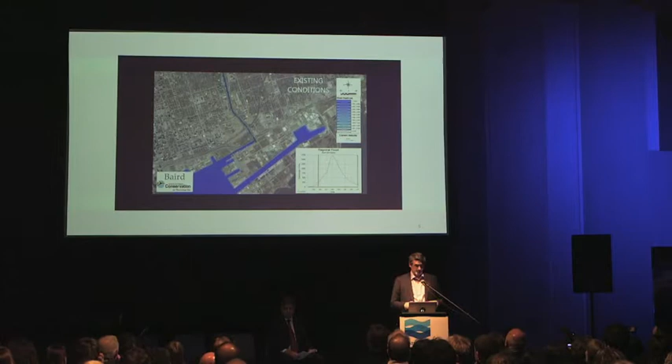So it creates a significant flood risk for most of the Portlands north of the ship channel, which is that long blue line - the channel still used for shipping as part of the port. Really between there and the river, that whole zone, as well as some of the area south of Eastern, those neighborhoods are all still in the floodplain.

So this project is about flood protecting the Portlands, flood protecting part of Leslieville, and really making it possible for revitalization to finally happen here, because it has been held back not just by flooding, but also by contamination. What you can see here is an aerial photo from years past when much of this land was used for storage of oil and coal tar.

The remnants of that are still in some places in the soil. So we have to dig up the soil, remediate the soil, make it habitable and safe for people, which we have specialists on our team and consultants helping us do, and make sure that it's safe for the river to run through it. Once that has been excavated and cleaned up, we will then reroute the river and create the outlets necessary to let the river run free and stop flooding.

For those who are on the 20-year circuit, we have a photograph here. Pictured in the blue sweater is Mark Wilson, who was the former chair of Waterfront Toronto, way back in the day when he was starting up the task force to bring back the Don. So the efforts to do something with this river really have been decades in the making.

I think this effort started in the 80s. In 1989, they formed as a real group, and in '91 we had the task force to bring back the Don. So we have this amazing story of a community activist, river activist, who went from activist to chair of Waterfront Toronto, and Mark was at the helm for much of the time that we were planning the restoration and flood protection of the river.

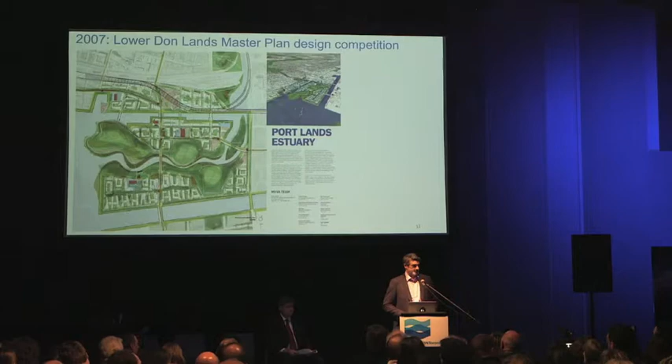They will be getting up here to present their work shortly. They are the ones who produced the rather amazing model that is to your right in the room. Thankfully, even though it's been 10 years and they haven't gotten to actually design the river until now, they haven't quit. So we're really glad that they're sticking with us throughout this process.

In the back on the screen behind me is a timeline of how we've gotten here. I'm not going to go through the details, but as Councillor Fletcher mentioned, we did our design competition, and then went through the rest of the environmental assessment process in 2009. We were very close to having a completed environmental assessment for a version of the plan that you see today.

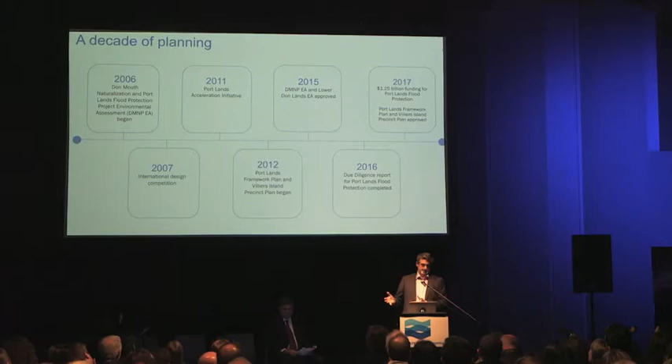We then had the alternative planning process that the councillor mentioned, which led to the Portlands Acceleration Initiative, led by David Kusturin, who will be getting up here to speak in a minute, and the due diligence report and the eventual completion of the environmental assessment.

So as of 2015, we had approval for this project. We're now into detailed design. So some of what you'll see tonight looks a little different than some of what was in the drawings, but that's part of the natural design process.

I know Michael Van Valkenburgh's team is really excited to be sinking their teeth into what these wetlands really look like, what plants are in them, what is the course of the river, and how do we bring recreational uses here that can make this part of the whole ravine recreation system.

That's very much what we're looking for your feedback on tonight as part of this process, as this design evolves. There will be more iterations of this over time, and we will continue to solicit public feedback as that happens. So that was a maybe not so quick history of how we got to where we are today.

Thanks, Chris. I've got a minute and a half. I'm kidding.

So Chris showed a bit of a video of what the floodwaters would look like in a regulatory storm. The blue areas here are actually what the flood, or where the floodwaters would flow to in that storm. You can see there's an area that someone in our office thinks looks like a rhinoceros, outlined in blue, that goes into the downtown.

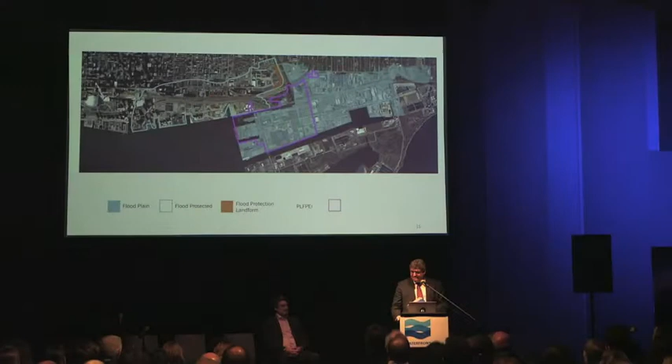The area that we're going to be involved with is outlined in pink here. That's the boundaries of our project site. That's about 290 hectares of land that you see there that's currently at risk of flood. That will all be removed from the floodplain once this project is completed.

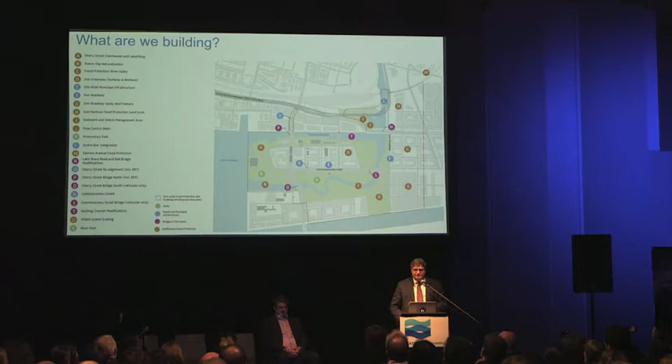This is the project. It's a number of different components. Effectively, it's the creation of a new river valley and the construction and implementation of infrastructure required to service this land in the future, as well as to accommodate the construction of that river. It includes 4 components: the river and flood protection features, the roads and services, bridges, and new parks and public realm.

First and foremost, we have the river component. There's the main river itself, and then a number of river structures, floodplain, landforms, valley wall features. In fact, the entire area outside of the river will be raised by anywhere from 1 to 2.5 meters to bring all of these lands out of the floodplain.

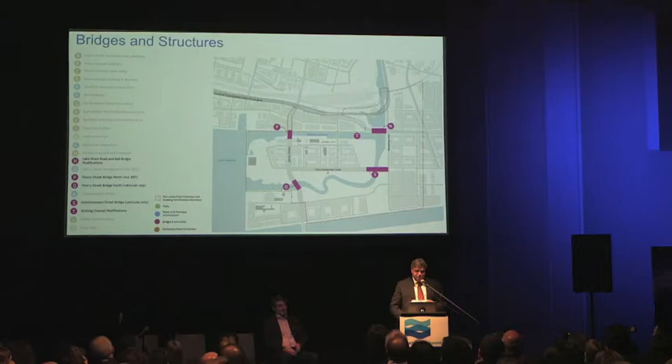That's the biggest part of the project, what we're involved with, and that's about 8 or 9 different large components. The second piece is bridges. We have 3 brand new bridges: the Cherry Keating Bridge, Cherry Bridge across the river mouth, a new bridge at Commissioners Street, and rebuilding the Lakeshore Bridge across the Don River.

We've got new roads, or rebuilt roads. Cherry Street will be rebuilt in a new location slightly west of where it exists today. Commissioners Street has to be rebuilt, as does the Don Roadway. There's a couple of reasons for that. I mentioned that we're actually raising the grade, so all of those streets are at current grade. They all have to be raised by anywhere from 1 to 3 meters.

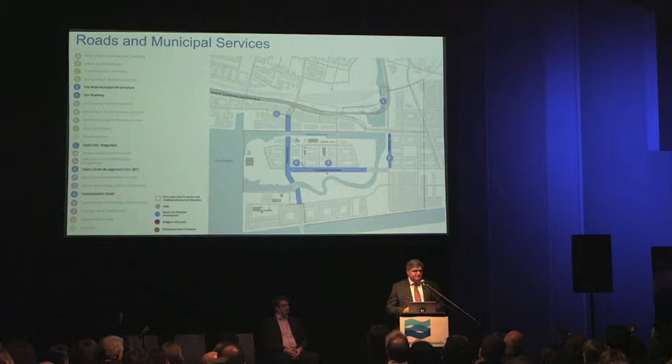They also all need new services. The services in the Portlands were installed 50, 60, 70 years ago to accommodate the industrial uses in the Portlands. We are looking to create new mixed-use neighborhoods, residential and commercial properties, and the services required for those properties are substantially more demanding than the services that exist to date.

And then, although they will be built last, there's the new parks and public realm: Promontory Park and the river parks, which will line the river all the way from the existing mouth to the new mouth at the inner harbor.

So how did we get here? We spent a lot of time, as Chris mentioned, in the planning, and once we had that approval from the province in terms of the environmental assessment, we undertook a due diligence exercise. That was really to give us and to give our government stakeholders confidence that the schedule, the budget, the scope of this project could be delivered for the numbers and timeframes that we were telling them we could deliver.

We spent a great deal of time looking at the site, doing site testing on geotechnical and environmental contamination. We looked at schedules, we looked at cost for all of the components, and we looked at how should we deliver the project. What is the best way to reduce risk to the public sector and engage the private sector to the maximum extent that we can, leveraging their knowledge and expertise? And what were some of the unique risks and challenges we would face?

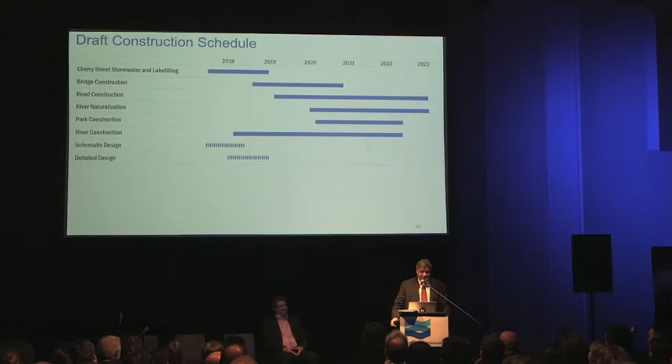It's real news. We will then begin construction of bridges, roads, doing the naturalization, and ultimately the parks, and expect to have the project fully complete, including all the trees and green spaces that you see on that beautiful model, by the end of 2023.

So I mentioned we have started work. You can see the little island poking up above this barge, and if you've been lucky enough to see this show up about once a week or so, there's about 8,000 tons of material that we're depositing at the mouth of the Keating Channel, and again, that will continue through this summer and in fact through into next year.

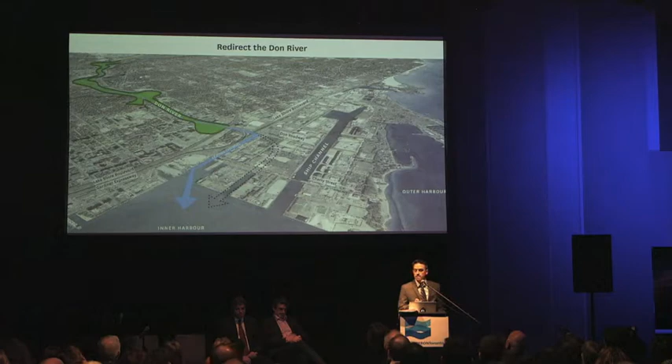One of the big drivers for the competition scheme that MVVA brought back in 2007 was looking at those existing conditions, that hard right-hand turn that's been referenced as it hits the Keating Channel, and the natural flow of the Don River wanting to revert back to pushing out towards Lake Ontario.

So the scheme our office brought was thinking about redirecting the Don River and allowing that new realigned river configuration to structure the urban form, with the open spaces left to the edges of that.

Part of that driving idea was that we would address flood protection with a three-tiered approach: one being this new naturalized mouth of the river, two being using the existing Keating Channel as is, and thirdly, having an overflow spillway that would go out to the existing ship channel.

So in looking at the full composition of all of the potential development that this unlocks, it creates a significant new series of neighborhoods within downtown Toronto. Within this dashed blue boundary would be the limit of parks and floodplain work that is part of the final condition of this flood protection project.

So we're looking at nearly 100 acres, as was noted, of new open space and river edges that are being created. So in the last few months, we've dropped back into the world of thinking about this project at a detailed design level.

Some of the bigger challenges in finding that coherent integrated solution: first would be flood control, two, the naturalization that's required as part of the environmental assessments, and then also the need for placemaking.

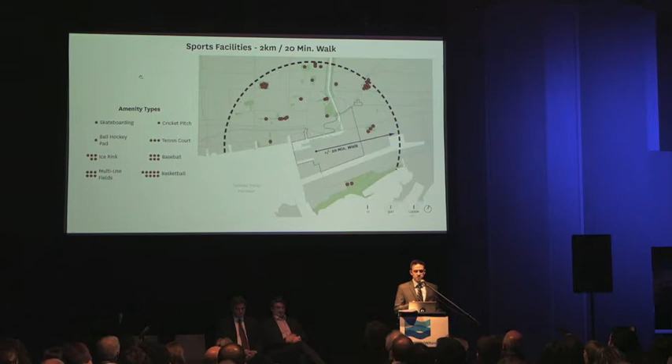Likewise with sports facilities, there's certainly some multi-use fields and baseball fields. We've started to think about how those are being used and the importance of what needs more of in this area. Accessible nature, we certainly know that this project will bring a significant component that is underserved at the moment, because currently it really only exists within Corktown Common and the Cherry Beach area. And then lastly, citywide destinations.

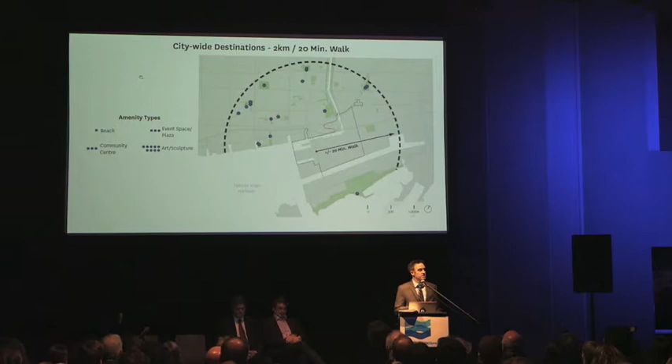One of the opportunities we see here is that this park system, this very large contiguous open space that is the anchor to the waterfront, has a great opportunity to add citywide destination type programming, which seems underserved. You have Cherry Beach Park, a fantastic one, and other spaces outside this 20-minute walk radius that are fantastic, like the amphitheater at the Music Garden or the event space plazas around Harborfront. We've started looking at how those programs could be distributed across the entire park. The prominence of Promontory Park, as it's been called for the last 10 years, lends itself to great citywide destination programming, with close proximity to the future LRT stations off Cherry Street—a great moment for sightlines back to the city skyline.

We also think there's a great opportunity at Villiers Park, at the very east end of the project, as another moment for a citywide destination that draws you to both ends of the new Villiers Island precinct—pooling and stretching other types of programs, from sports and neighborhood parks, down through the linear spine of the River Valley Park system.

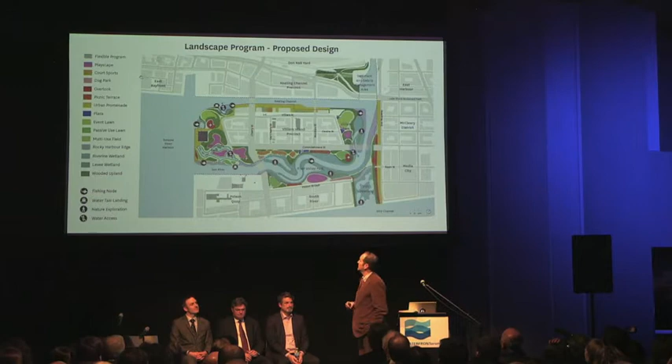So don't get nervous that you have to memorize this whole list. What you get from this diagram, which is a more refined version of the types diagram that Herb just showed you, is a kind of neat mosaic of different things all mixed together. And that, we believe, is the answer to success.

I have to tell you one quick story. When we first started working on Brooklyn Bridge Park, which I've been working on for 20 years, we went to community meetings, and of course everyone doesn't understand what's going on, and there was a lot of apprehension because it was an abandoned industrial waterfront. A lot of people hadn't been there, and it seemed very marginal and out of the way. One of the things the cynics used to say, a lot of them, was no one's ever going to go to Brooklyn Bridge Park, because it was a little distant. You had to ride your bike to the area, and it wasn't easy. So it wasn't an unrealistic idea to say that.

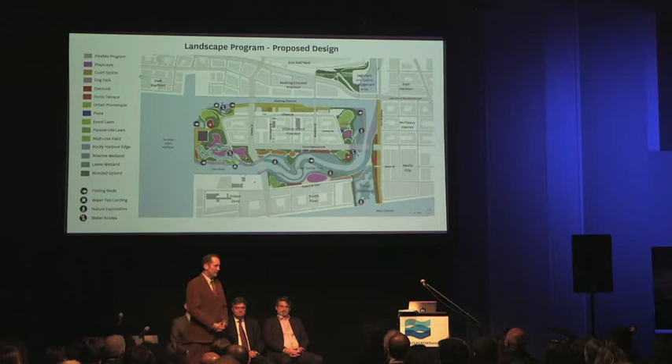Basically, through the consultation process like this, and I worked on that with Ken Greenberg, who I see right in the audience here, we had an extensive outreach, and people talked about what are the unique possibilities of the site. And then, of course, there's just lots of good, clean fun that people want to have, right? Fun is always a key to success, too. And a lot of it is not that hard to do. You just need to do it.

So what this diagram talks about is a big mixture, or a mosaic, of a lot of good, clean fun. Some of it you expect, and some of it is going to be unique. And guess what? That's what we did in Brooklyn Bridge Park. We made this whole collection of things, one after another, and it's sort of the collage experience of it, seeing one after the other in an almost surreal way that makes it extremely compelling. And if Brooklyn Bridge Park has got any problem right now, it's that it's kind of too crowded sometimes for misanthropes like me who want to just go out in nature. So anyway, they were wrong about no one's ever going to come, and we're going to have a success here too.

One of the great things for everything that's coming after this is that the public space is going to be made first, or at least phase one of it, and that will create the 'there,' remove the skepticism, and make everybody excited. So one of the things we can do is make edges that engage the water and allow you to get close to it like this.

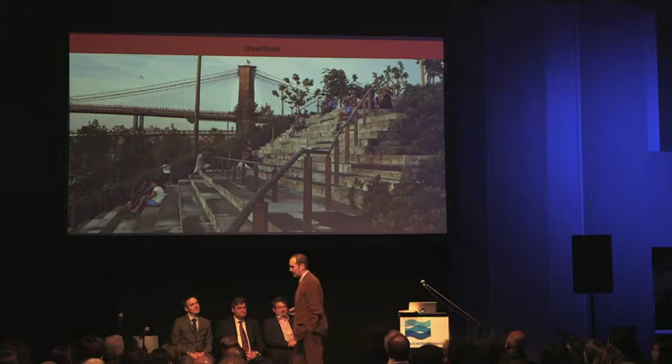This is a kind of romantic overlook, like that Ethan Hawke Paris movie, sitting near the river and overlooking, having your own romantic moment. We need to have places for that in the park, and we can do that - overlooks getting high in elevation above the shoreline.

You wouldn't think, because it's such a view, right? It's so flat and there's so much view, you'd think, well what? But actually when you get up - this is sort of the lesson of Riverside Park in New York City - you get a whole different dimension, and you get to look down on other people in the foreground, so it's a great opportunity.

You could also have overlooks that are right near the edge of the water as well.

The picnic terraces - we had a concept we're applying here, and I'd love to hear your feedback on it. We called it the in-town vacation. If you have something for everybody in the family, for the old people, the littlest people, and the teenagers - those are very hard to make happy, but you can. If you have everybody happy, you don't need to leave. You can stay there all Saturday.

You don't just take the kid begrudgingly to the playground for an hour and a half, or as long as you can stand it, and then take them home again. You can go here, and the teenager can play soccer, and grandma could chill out, and mom - all these different things can happen at the same time. And then when you all change places in life, which we all do, you can still be happy in the same place, because there's things for you at your different stage of life.

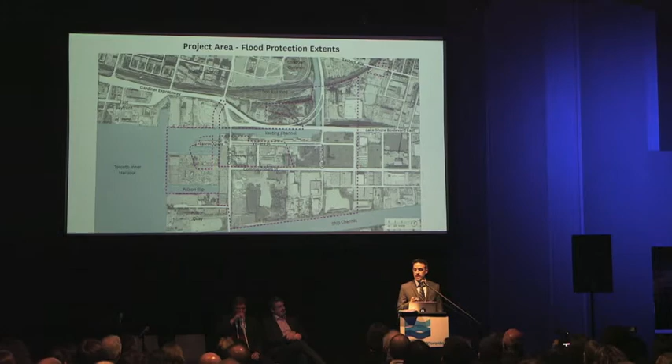The boundary shown here in pink, overlaid on top of the existing conditions photo, is the full extent of the flood protection project, including the parks, the roadways, the bridges, and the river system. Looking at the design parameters defined over the last 10 years as responses to environmental assessments and other planning initiatives, we have a series of design parameters that we use as a starting point for making decisions on the project.

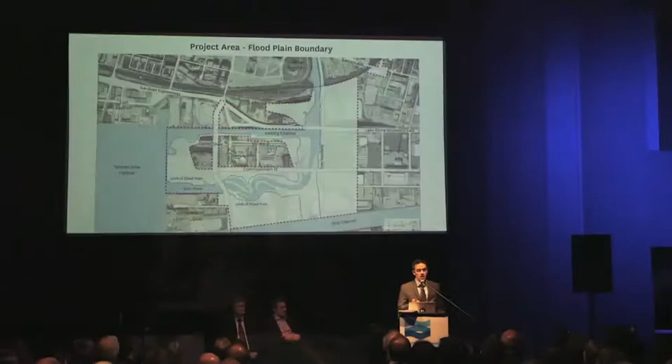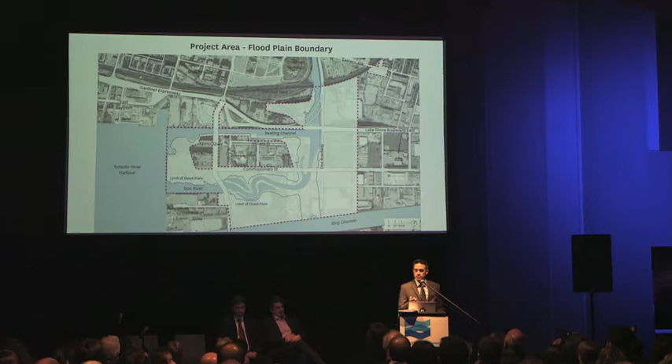First and foremost is addressing flood protection. That includes thinking about the open spaces we're creating within this project and how they relate to a floodplain line. Everything below the dashed blue line there, topographically, is needed to address a regulatory flood event — that Hurricane Hazel-size event that could flood that entire space between those two blue lines. That's really important to understand.

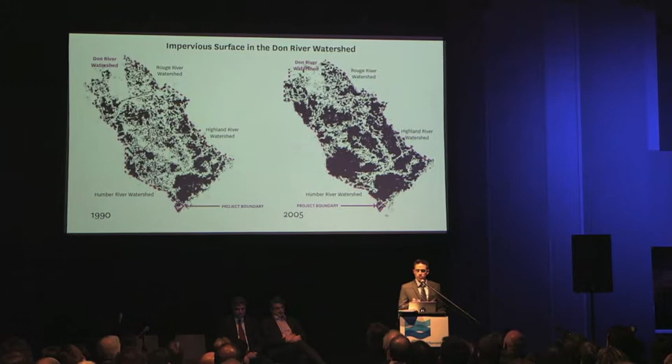Looking at this diagram over the last 15 years, between 1990 and 2005, it shows the change in impervious surfaces within the Don River watershed is quite dramatic. The dark black boundary, or dark black shaded area, shows how much more impervious surface there is in just that 15-year period the study covered.

Through the work of our team and TRCA, looking at that flood model of the conditions upstream in the Don River, the potential extent of a regulatory flood event and how much area is impacted is quite dramatic.

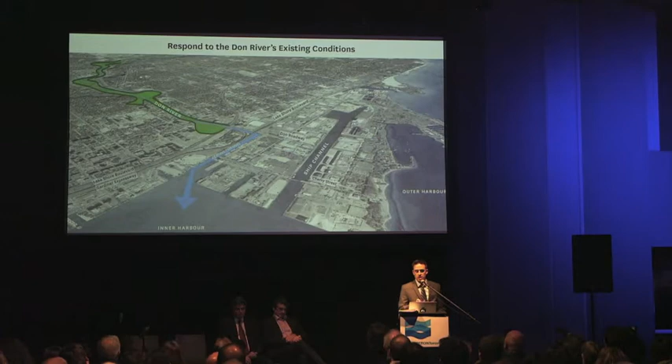One of the big drivers for the competition scheme that MVVA brought back in 2007 was looking at those existing conditions — that hard right-hand turn referenced as it hits the Keating Channel — and the fact that the natural flow of the Don River wants to revert back to pushing out towards Lake Ontario.

So the scheme our office brought was thinking about redirecting the Don River and allowing that new realigned river configuration to structure the urban form, with the open spaces left to the edges of that.

Part of that driving idea was that we would address flood protection with a three-tiered approach: one, this new naturalized mouth of the river; two, using the existing Keating Channel as is; and third, having an overflow spillway that would go out to the existing ship channel.

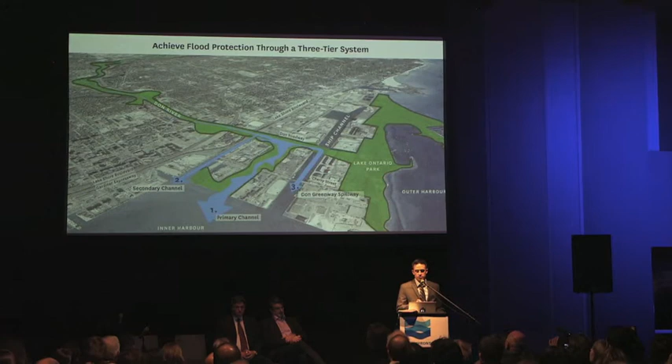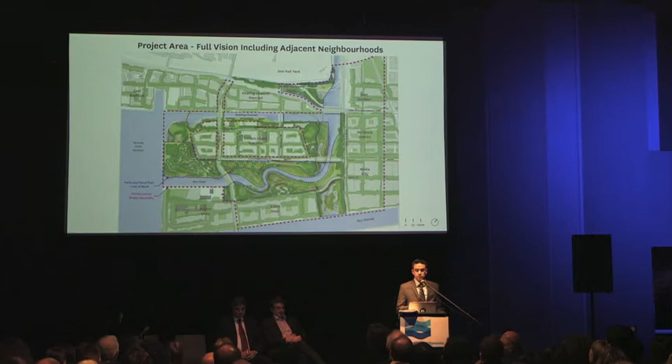Looking at the full composition of all the potential development this unlocks, it creates a significant new series of neighborhoods within downtown Toronto. Within this dashed blue boundary would be the limit of parks and floodplain work that is part of the final condition of this flood protection project — nearly 100 acres of new open space and river edges being created.

In the last few months we've dropped back into thinking about this project at a detailed design level. Some of the bigger challenges in finding a coherent, integrated solution: first, flood control; two, the naturalization required as part of the environmental assessments; and then also the need for placemaking.

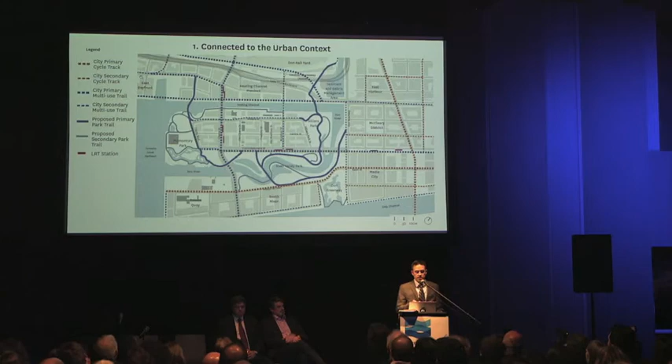We've thought about these as six big moves. One, thinking about future and current connections — whether it's the rail transit coming down through here along Commissioners Street and Cherry Street, the multi-use bike path network tying back into downtown Toronto shown by the darker blue line, other secondary pedestrian trails linking through this area, or where those moments of future LRT would be, shown as the dashed red lines here, here, and here.

Number 2 out of those big ideas was that we need to accommodate the needs of the community. That's one of the reasons we're here tonight, to get input. Out of the 10 years of work we've been doing, we've gotten a lot of good feedback, and we've represented that within the model and the boards we're sharing here tonight.

We've also been thinking quite a bit, as we've gotten into the detailed design part of this project, about the importance of spatial and sectional variety. So looking at how we can create a much more rich landscape by thinking topographically, layering spaces so you don't see everything at once.

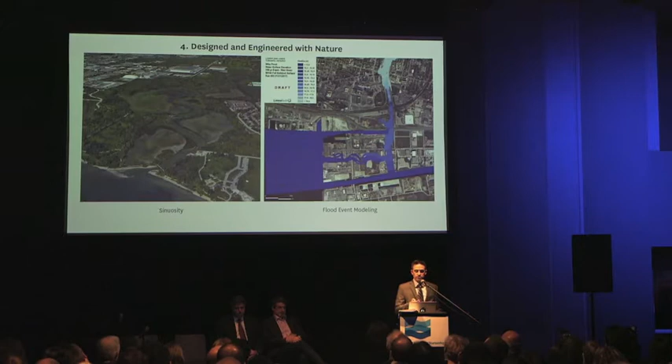Fifth would be thinking about all the layers of this and how to orchestrate that into a complete ensemble. So it's not an engineering project, or strictly a parks project, or a roadway project—it's that they're all coming together. It's a collaborative approach, a comprehensive solution.

And then sixth would be building on the sustainable principles that Waterfront Toronto has, thinking about the resilience of the systems we're doing, and how human experience needs to drive these landscapes. Those are all key components as we progress within the design phases.

As we've started to progress and refine the park programming, we've revisited how we think about the organization of these spaces, and we've identified four landscape types to help us think through that process. The first would be citywide destination.

What brings people in? How much of that do we want to have in this park? That people come from a bigger distance away. What type of amenities, programming do you want if it's a neighborhood park—the type of space people come to on a daily basis. The need for recreation, sports, and obviously you can't overlook that we're creating a naturalized river through here, so making access to nature.

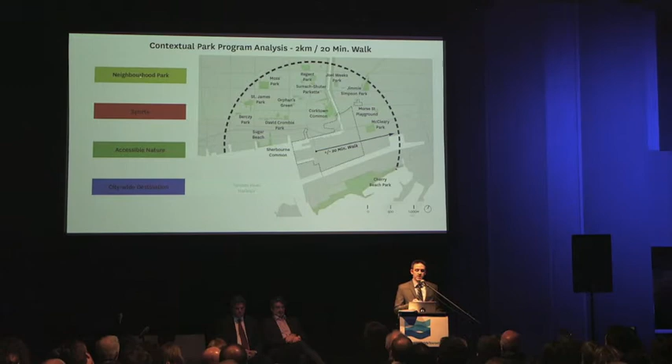So some of the work we've been doing over the last few months has been looking at that contextually, within distance of the site, and what type of activities already exist based on those four classifications. So within a plus or minus 20-minute walk...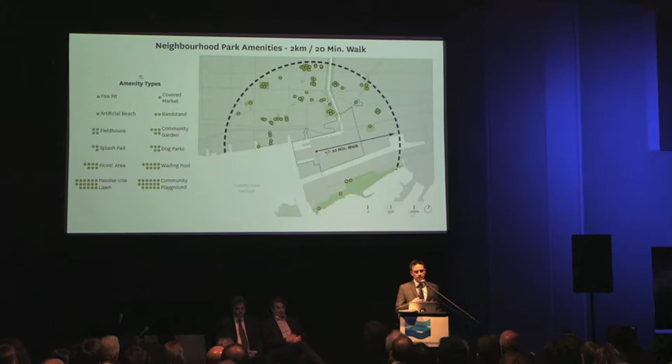You can see a range of neighborhood-type park activities, anywhere from some picnic areas and passive lawns to community playgrounds. So we've mapped that, started to classify what types of program we've seen and how they're being used.

Likewise with sports facilities, there are certainly some multi-use fields and baseball fields. We've started to think about how those are being used and the importance of what needs more of in this area.

Accessible nature—we certainly know that this project will bring a significant component that is underserved at the moment, because currently it really only exists within Corktown Common and the Cherry Beach area.

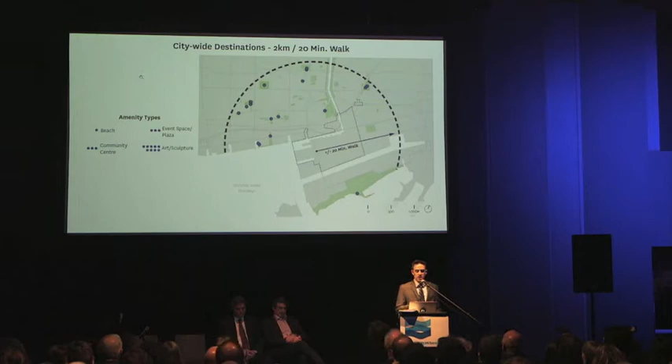And then lastly, citywide destinations. One of the opportunities we see here is that this park system, this very large contiguous open space that is the anchor really to the waterfront, has a great opportunity to add what seems to be underserved as far as citywide destination-type programming.

So you have Cherry Beach Park, which is a fantastic one. You have other spaces outside this radius that aren't within a 20-minute walk that we think are fantastic spaces, like the amphitheater at the Music Garden or the event space plazas down around Harborfront.

So we've started to look at those types of programs and think about how they could be distributed across the entire park. The prominence of Promontory Park, as it's been called for the last 10 years, lends itself to a great opportunity for this citywide destination-type programming, with the close proximity of the future LRT stations off of Cherry Street. It's a great moment to have those sightlines, those views back to the city skyline.

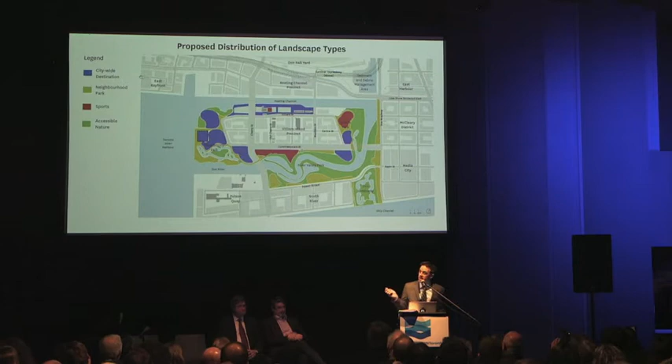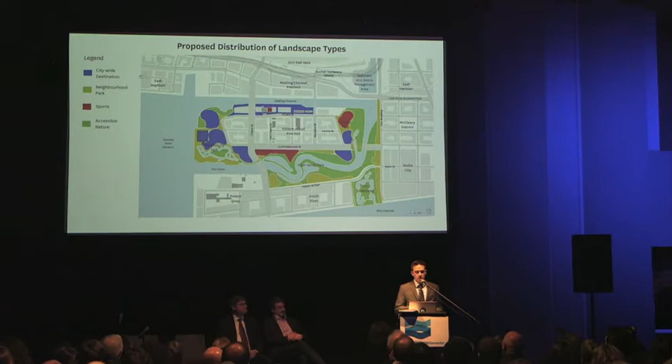Also, though, we think there's a great opportunity in looking at Villiers Park at the very east end of the project as another moment where we could have a citywide destination that draws you to both ends of the new Villiers Island precinct, with this pooling and stretching of other program types, from sports and neighborhood parks down through the linear spine of the River Valley Park system.

I think at this point, I'm going to pass the presentation over to Matt Urbanski, and he's going to talk a little bit more about the things that we think the waterfront needs more of.

Okay. There we go. Thank you, Herb. I think you all have a good idea why Herb is in charge of steering this ship right now. I think you have a little good sense of that.

I'm a newbie, of course, only 11 years on this. For a whole year, I was actually saying it was 10 years, but now I realize it's actually 11.

Some things you already have in Toronto, and some things you don't have on the waterfront necessarily. So one of the things we started with, thinking about and talking to people, is what are the missing experiences when we look at that context already.

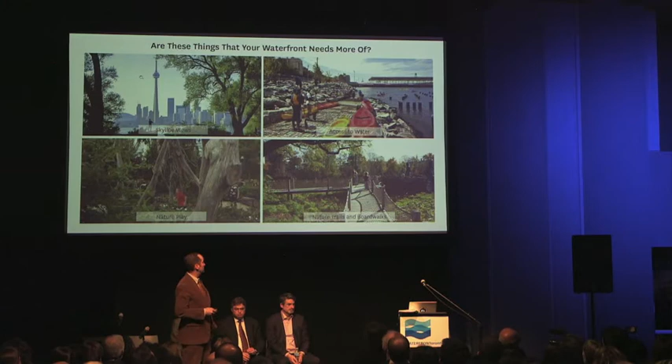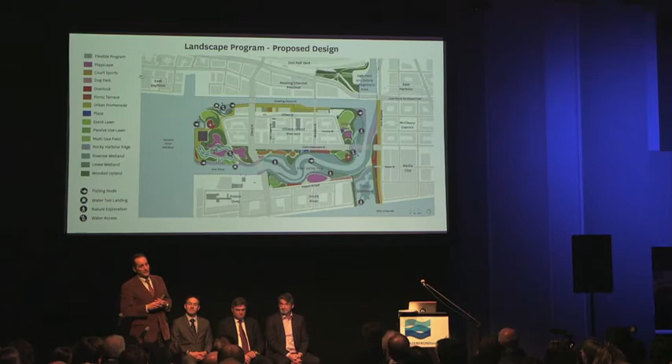I have to tell you one quick story. When we first started working on Brooklyn Bridge Park, which I've been working on for 20 years—so they win in terms of my time on that—we went to community meetings, and of course everyone didn't understand what was going on, and there was a lot of apprehension because it was an abandoned industrial waterfront.

Sounds familiar. A lot of people hadn't been there, and it seemed very marginal and out of the way. That also sounds familiar. One of the things the cynics used to say, and a lot of them said it, was 'no one's ever going to go to Brooklyn Bridge Park.' That's what they would say, because it was a little distant—you had to ride your bike to the area, and it wasn't easy. So it wasn't an unrealistic idea to say that.

Through the consultation process like this, I worked on that with Ken Greenberg, who I see here in the audience. With this, we had an extensive outreach, and people talked about what are the unique possibilities of the site.

There's just lots of good, clean fun that people want to have. Fun is always a key to success too, and a lot of it is not that hard to do, you just need to do it. So what this diagram talks about is a big mixture, or a mosaic, of a lot of good clean fun. Some of it you expect, and some of it is going to be unique.

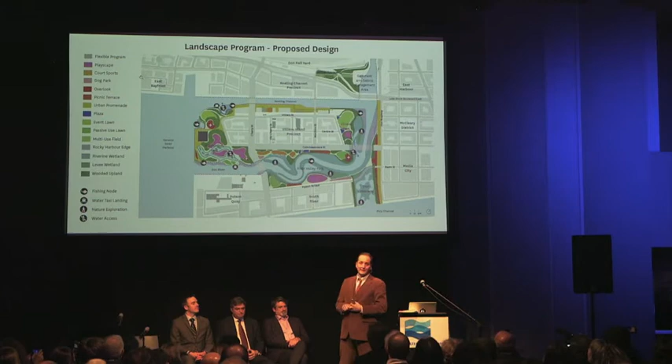And guess what? That's what we did in Brooklyn Bridge Park. We made this whole collection of things, one after another, the collage experience of it, seeing one after the other in an almost surreal way that makes it extremely compelling. If Brooklyn Bridge Park has got any problem now, it's kind of too crowded sometimes for misanthropes like me who want to just go out in nature. So they were wrong about no one's ever going to come, and we're going to have a success here too.

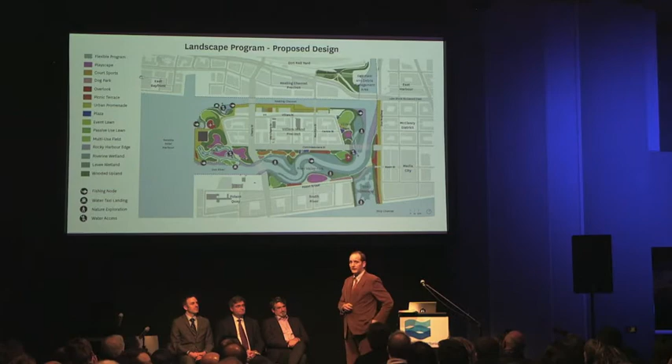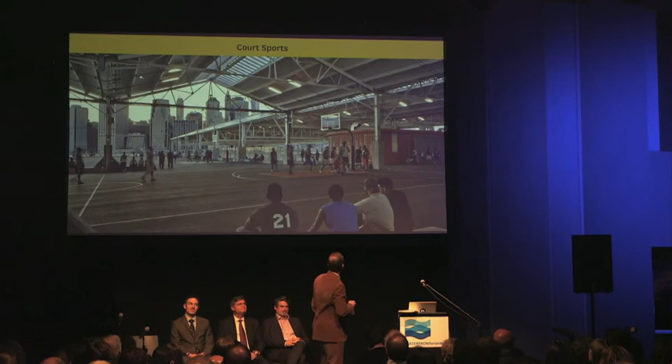Multi-use field - a green space that many people can use in different ways and at different scales is something we're looking at. Court sports, of course, because everyone needs to be exercising, and it's also a great social space. This is how you bring teenagers in as well - if you have the right things they're looking for, it's one way to bring them in. It's very successful in Brooklyn Bridge Park that way. This is another way of doing that.

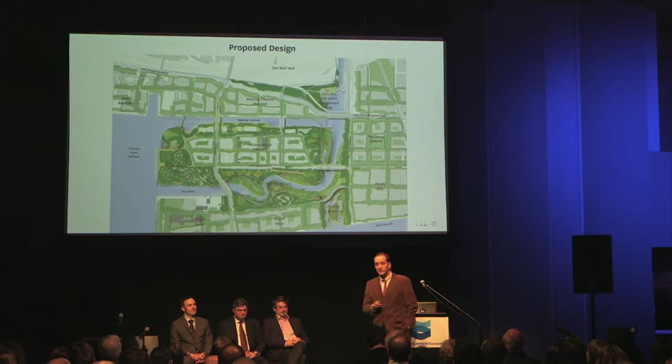This is sledding in Corktown. So this is where that all comes together in a more illustrative version of the plan. We have this in the model as well. Just going to do a few before and afters here. This is looking east, from the base of Cherry Street, what it looks like right now. Same view. Same exact view.